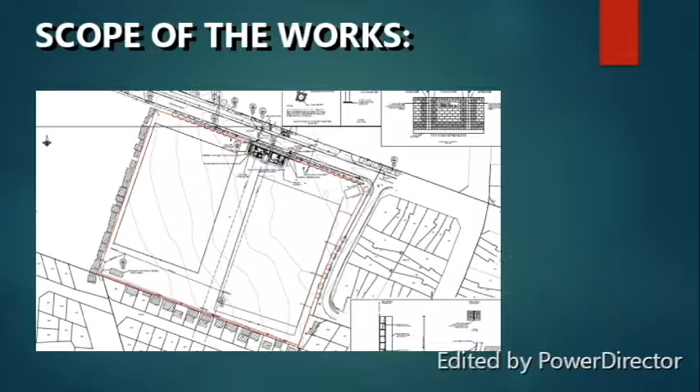Edifice Consulting Engineers were contracted to design the boundary wall around the sports facility. The wall is constructed from concrete blocks and reinforced with concrete fill and reinforcement bars.

The project is located at Mbekweni Sports Facility along Booking Street in Paarl. The site is surrounded by community houses and the senior secondary school, and is also accessible via Junkie Street.

The project consists of the upgrading of the sport facility, including the construction of a new multi-purpose ablution facility, ticket offices, and the perimeter boundary wall.

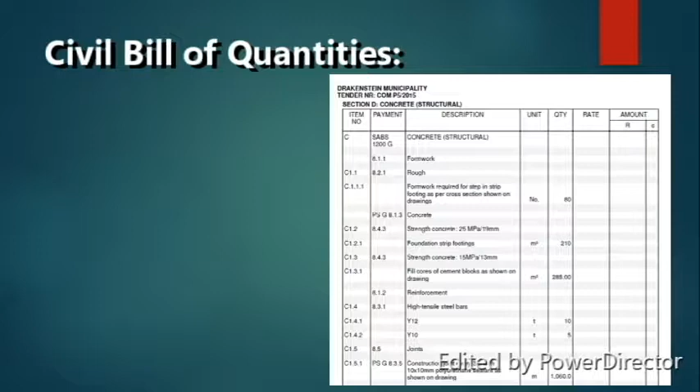The bill we received details how they measured the boundary wall works. In the bill, we can see the structure of the elements in the trade are measured in the order formwork, concrete, and reinforcement. Starting with formwork.

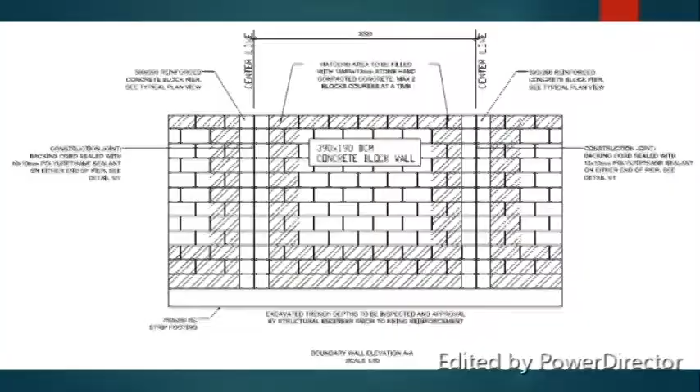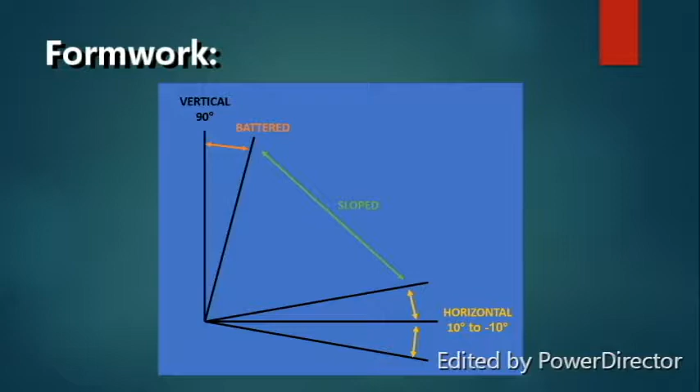Formwork is only required for the strip footings of the wall. SANS10120 G requires engineers to state the angle of installing formwork, whether it is vertical, battered, sloping, or horizontal. In this case, it is vertical, and the civil engineer did not mention this.

SANS measures formwork in meters squared, whereas the civil engineer measured it in number. This is ambiguous and makes other professionals raise questions of how much formwork is actually needed, as the size is not mentioned. In the description, the referencing refers to drawings but does not specify which exact drawing, making it difficult to find.

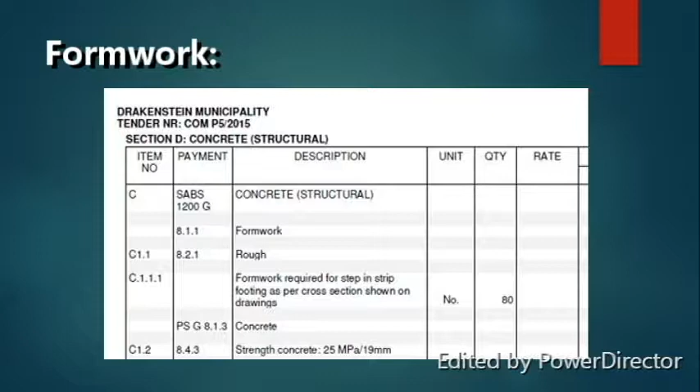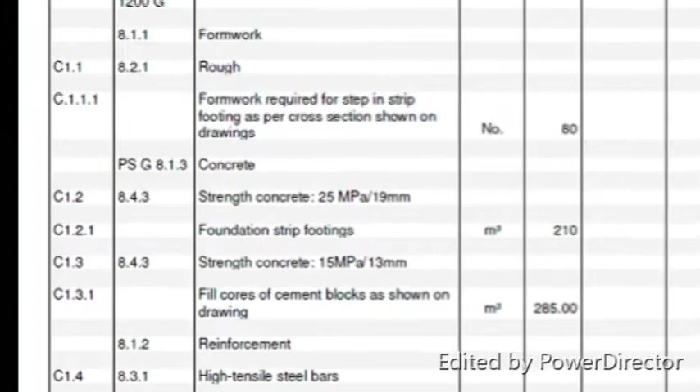Next, we'll be discussing concrete. The civil engineer arranges his concrete descriptions with the strongest concrete of 25 MPa first, whereas SANS orders it from the weakest to the strongest MPa of concrete.

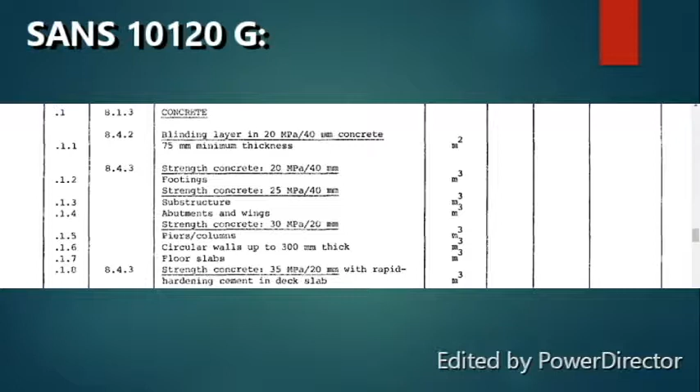Concrete is measured in meters cubed as stipulated by SANS.

Reinforcement. According to SANS, a basic price for the reinforcement is supposed to be stated, but the civil engineer omitted this from his bill.

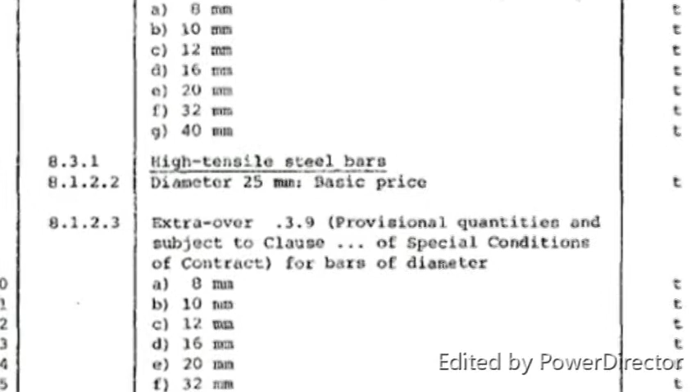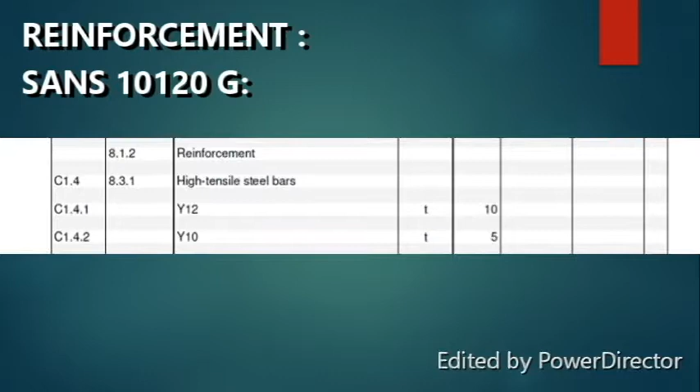SANS arranges their reinforcement with the smallest diameter bars first, but the engineer arranged his with the largest diameter first, being the Y12 reinforcement bars.

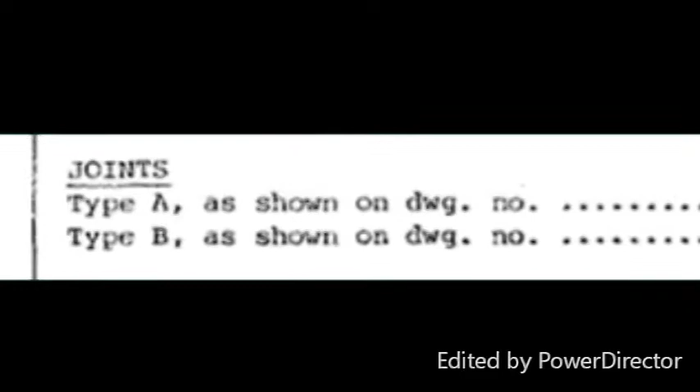Joints. The joints measured follow SANS by measuring them in meters, but the civil engineer does not state the type of joints used.

Building works. There are no building works in the SANS documentation, and therefore there is no comparison of it. We could not understand why building works were included, therefore we contacted the engineer.

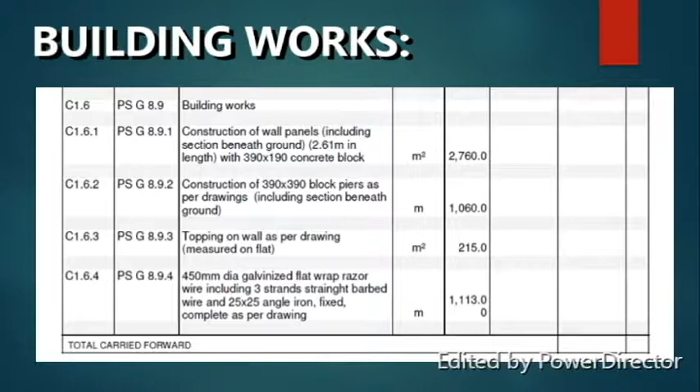He advised us that the abbreviation PS stands for project specifications, and therefore will not be the same as the SANS documents. Tender documents were given to us, and the PSG items were specified in detail in the scope of works and therefore were included in the bill.

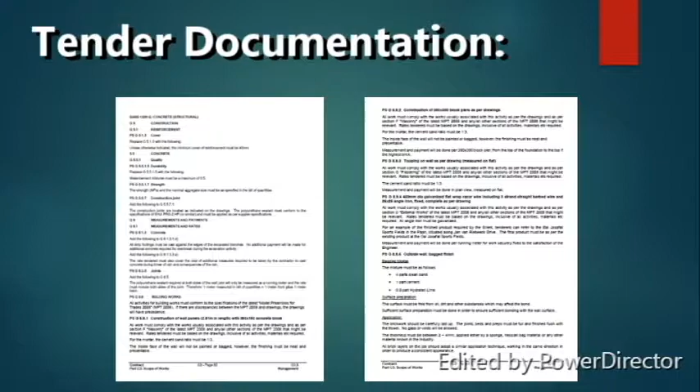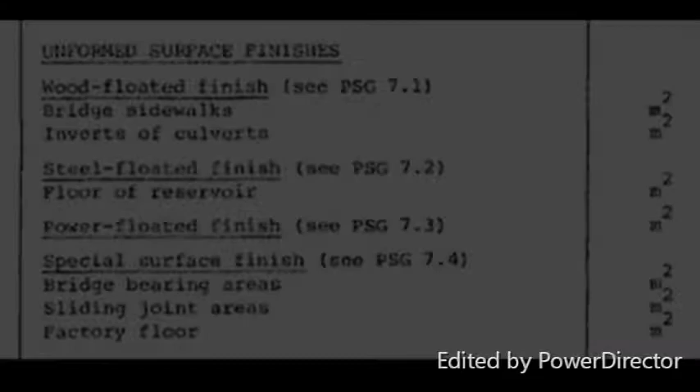Finishes. According to SANS, the finishes were supposed to be measured under the heading Unformed Surface Finish. The subheading in this case would be the type of finish, which is bagged, followed by the description outside wall. The civil engineer measured the bagging in meters squared as stipulated in SANS.

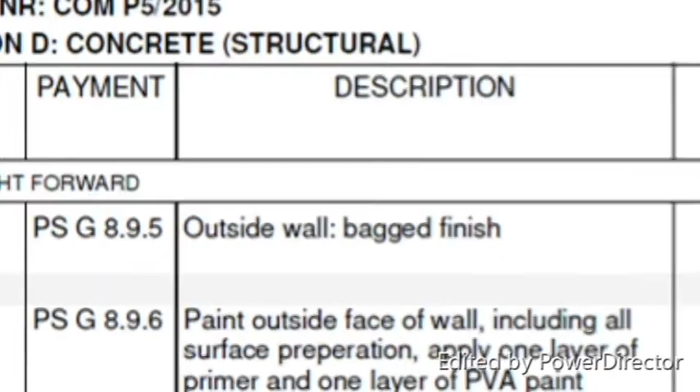In conclusion, the majority of the works adhered to SANS10120 G. Where differences were found, clarification was provided by the engineer and supported by the tender documentation we received. We understand that the bill was short and concise, but we believe it has dealt with all the aspects we required. Thank you for your time, and we hope you enjoyed.